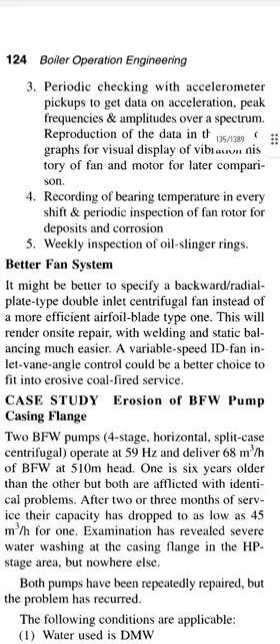Hi guys, this is page number 124.

Better fan system: it might be better to specify a backward radial plate type double inlet centrifugal fan instead of a more efficient airfoil blade type one. This will render on-site repair with welding and static balancing much easier. A variable speed ID fan inlet vane angle control could be a better choice to fit into erosive coal-fired service.

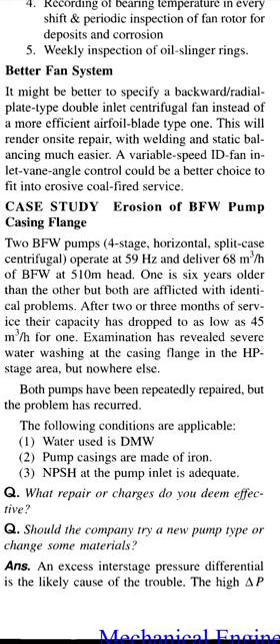Case study: erosion of BFW pump casing flange. Two BFW pumps, 4-stage horizontal split casing centrifugal, operate at 59 Hz and deliver 68 meter cube per hour of BFW at 510 meter head. One is 6 years older than the other, but both are afflicted with identical problems.

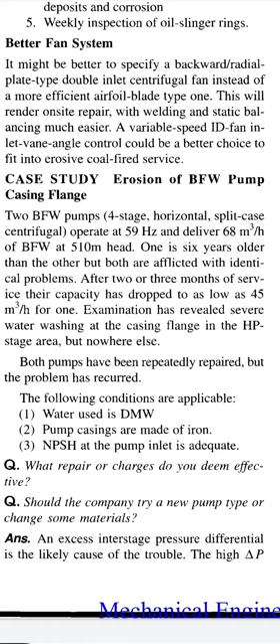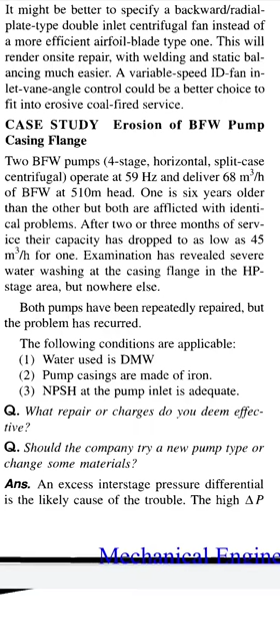After 2 or 3 months of service, their capacity has dropped to as low as 45 meter cube per hour for one. Examination has revealed severe water washing at the casing flange in the HP stage area, but nowhere else. Both pumps have been repeatedly repaired, but the problem has recurred.

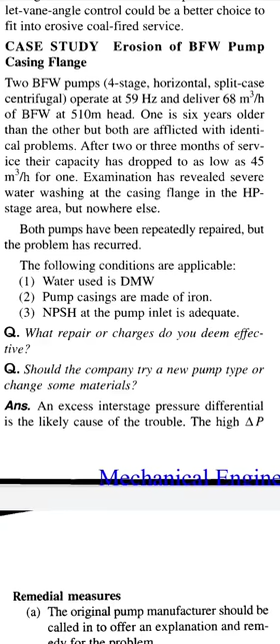The following conditions are applicable: water used is DM water. Pump casings are made of cast iron. NPSH at the pump inlet is adequate. Please share if you know the NPSH in the comments.

Question: what repair or changes do you deem effective? Should the company try a new pump type or change some materials?

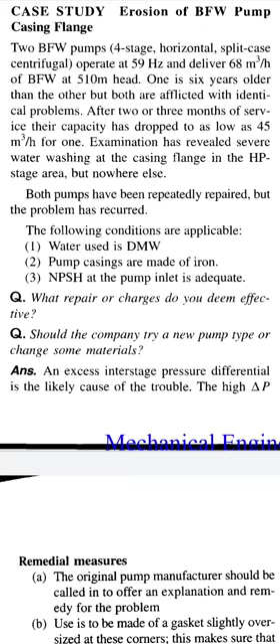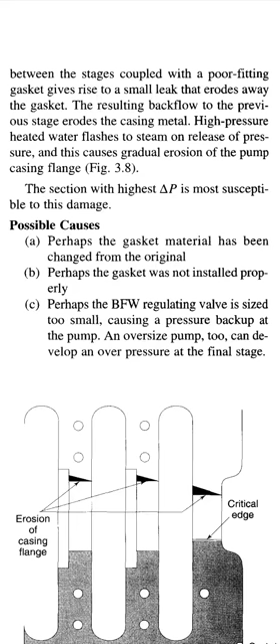Answer: an excessive interstage pressure differential is the likely cause of the trouble. The high delta P between the stages, coupled with poorly fitting gaskets, gives rise to a small leak that erodes away the gasket. The resulting backflow to the previous stage erodes the casing metal. High pressure heated water flashes to steam on release of pressure, and this causes gradual erosion of the pump casing flange.

The section with the highest delta P is most susceptible to this damage. Possible causes: A. Perhaps the gasket material has been changed from the original. B. Perhaps the gasket was not installed properly. C. Perhaps the boiler feed water regulating valve is sized too small, causing a pressure backup at the pump.

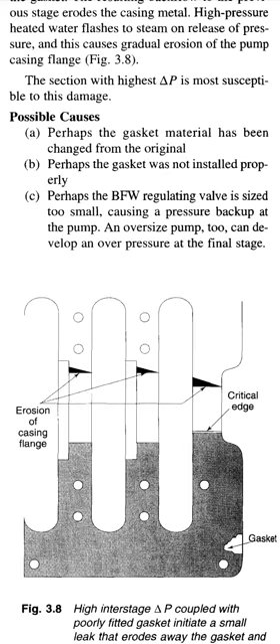An oversized pump can develop an overpressure at the final stage. We can see in the diagram how high interstage delta P coupled with a poorly fitted gasket initiates a small leak that erodes away the gasket and the pump casing flange afterwards. We can see the eroded gasket at the bottom of the diagram. Erosion of the casing flange.

This is mentioned, and the critical edge is also mentioned.

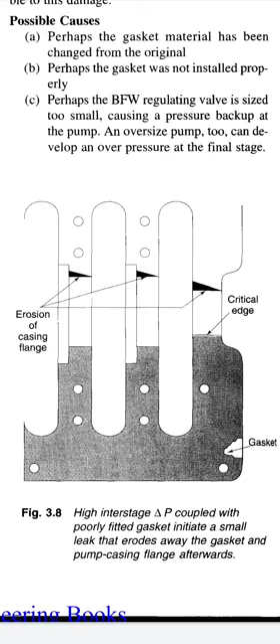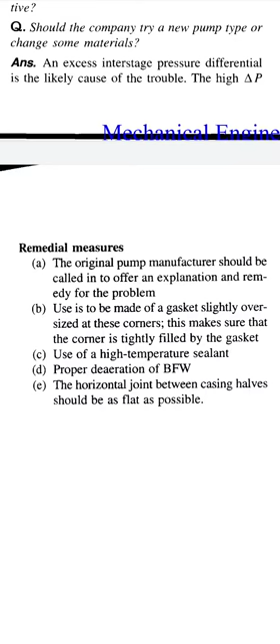Remedial measures: the original pump manufacturer should be called in to offer an explanation and remedy for the problem. Use gaskets slightly oversized at the corners. This makes sure that the corner is tightly filled by the gasket. Use of high temperature sealant.

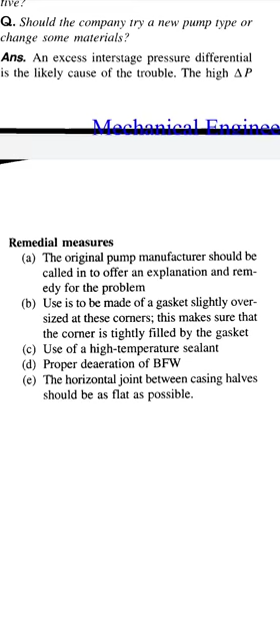Proper deaeration of BFW. The horizontal joint between casing halves should be as flat as possible. Casing gasket must be of proper thickness. When the rotor is installed, the upper casing should be torqued down to squeeze the casing rings slightly, which eliminates seepage and cavitation.

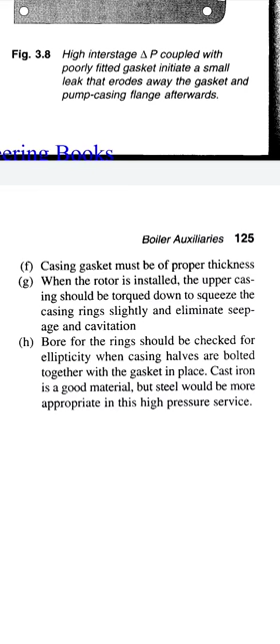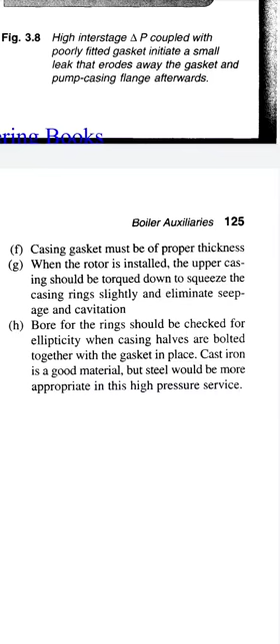The bore for the rings should be checked for ellipticity when casing halves are bolted together with the gasket in place. Cast iron is a good material, but steel would be more appropriate in this high pressure service.

That's it. We have successfully finished the third chapter, and here comes the fourth chapter: boiler mountings and accessories. The first question:

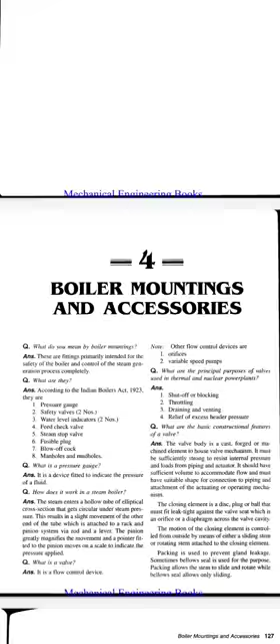What do you mean by boiler mountings? These are fittings primarily intended for the safety of the boiler and control of the steam generation process completely. Again, I am repeating: what do you mean by boiler mountings? These are fittings primarily intended for the safety of the boiler and control of the steam generation process completely.

Question: What are they? Answer: According to the Indian Boilers Act 1923, they are pressure gauge, safety valves (2 numbers), water level indicators (2 numbers), feed check valve, steam stop valve, fusible plug, blow off cock, manholes and mud holes.

Question: What is a pressure gauge? Answer: It is a device fitted to indicate the pressure of a fluid.

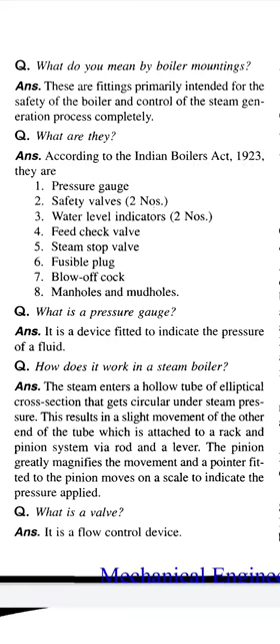Question: How does it work in a steam boiler? Answer: The steam enters a hollow tube of elliptical cross section that gets circular under steam pressure. This results in a slight movement of the other end of the tube, which is attached to a rack and pinion system via rod and lever. The pinion greatly magnifies the movement and a pointer fitted to the pinion moves on a scale to indicate the pressure applied.

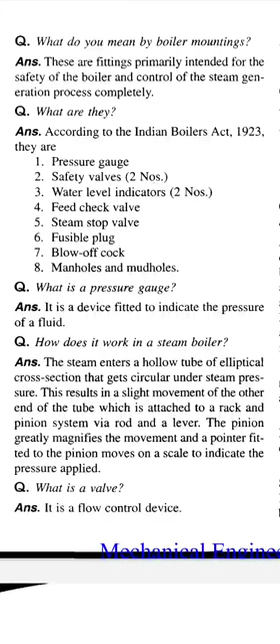Question: What is a valve? Answer: It is a flow control device. Note, other flow control devices are orifices and variable speed pumps.

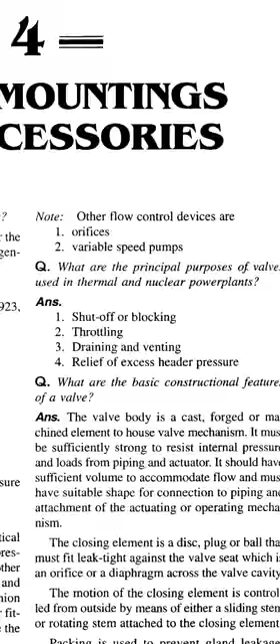Question: What are the principal purposes of valves used in thermal and nuclear power plants? Answer: Shut off or blocking, throttling, draining and venting, relief of excess header pressure.

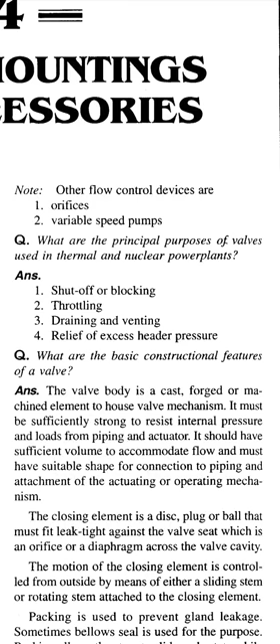Question: What are the basic constructional features of a valve? Answer: The valve body is a cast, forged or machined element to house the valve mechanism. It must be sufficiently strong to resist internal pressure and loads from piping and actuator. It should have sufficient volume to accommodate flow and must have a suitable shape for connection to piping and attachment of the actuating or operating mechanism.

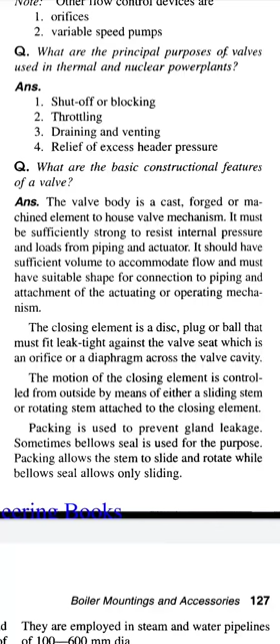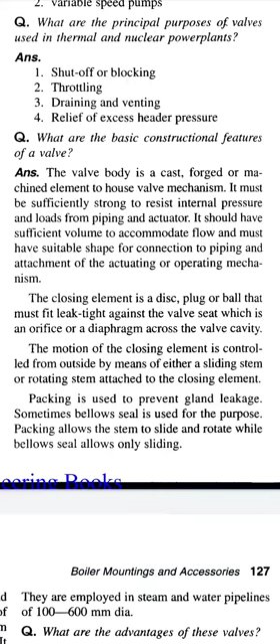The closing element is a disc, plug or ball that must fit leak tight against the valve seat, which is an orifice or diaphragm across the valve cavity. The motion of the closing element is controlled from outside by means of either a sliding stem or rotating stem attached to the closing element.

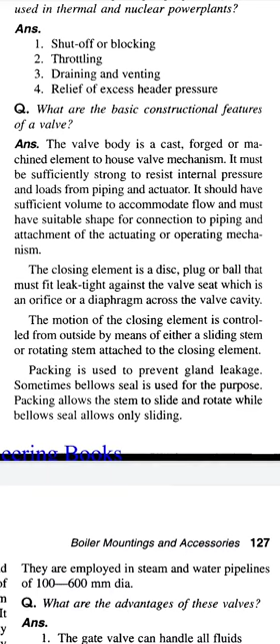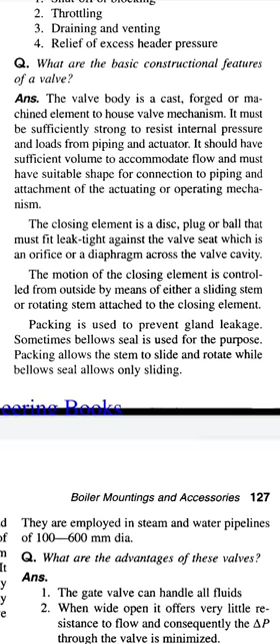Packing is used to prevent gland leakage. Sometimes bellows seals are used for the purpose. Packing allows the stem to slide and rotate while bellows seal allows only sliding.

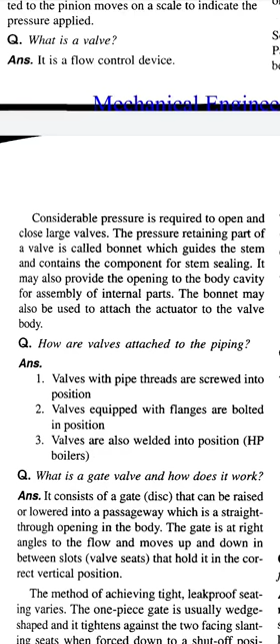Considerable pressure is required to open and close large valves. The pressure retaining part of the valve is called the bonnet, which guides the stem and contains the component of stem sealing. It may also provide the opening to the body cavity for assembly of internal parts. The bonnet may also be used to attach the actuator to the valve body.

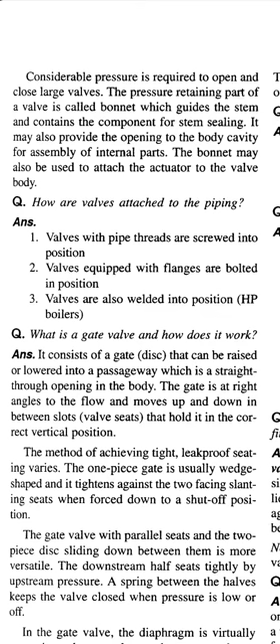Question: How are valves attached to the piping? Answer: Valves with pipe threads are screwed into position. Valves equipped with flanges are bolted in position. Valves are also welded into position.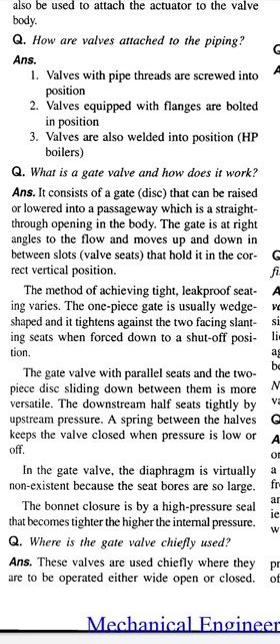HP boilers. Question: What is a gate valve and how does it work? Answer: It consists of a gate disc that can be raised or lowered into a passageway which is a straight through opening in the body. The gate is at right angles to the flow and moves up and down between slots, valve seats, that hold it in the correct vertical position.

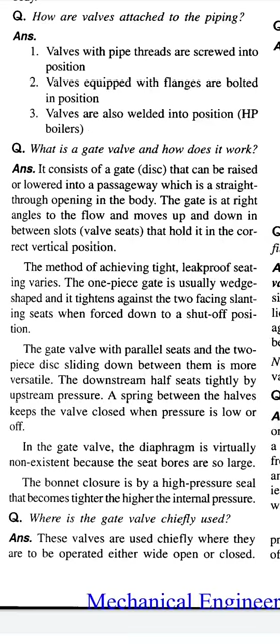The method of achieving tight leak-proof seating varies. The one-piece gate is usually wedge-shaped and it tightens against the two facing slanting seats when forced down to a shut-off position. The gate valve with parallel seats and the two piece disc sliding down between them is more versatile. The downstream half seats tightly by upstream pressure. A spring between the halves keeps the valve closed when pressure is low or off.

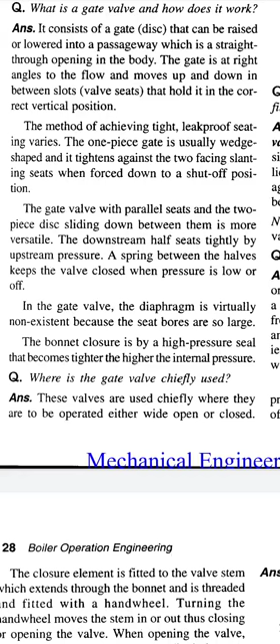In the gate valve, the diaphragm is virtually non-existent because the seat bore is so large. The bonnet closure is by a high pressure seal that becomes tighter the higher the internal pressure.